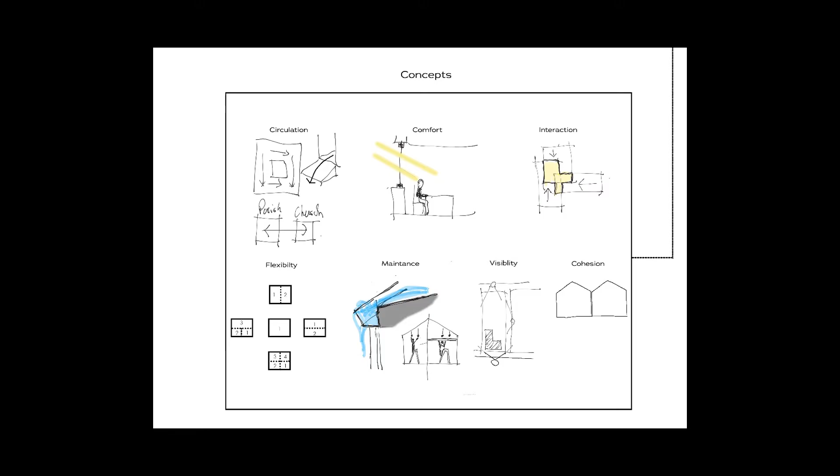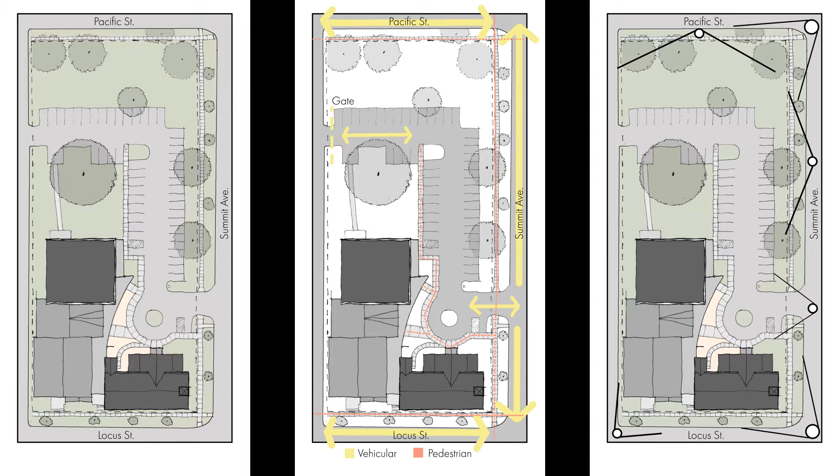Now on to views into the site. The three major views into the site are on Locust Street, Summit Avenue, and Pacific Street. Due to the trees surrounding the site, this can block your view into the site. The only real clear view of viewing the building is at the entrance at Summit Avenue. Due to the trees surrounding the site, it can cause the community to overlook the building.

Now the water runoff diagram. The site slopes downward diagonally from the corner of Pacific Street in the alley to the entrance of Locust Street and Summit Avenue. Water drainage mostly runs down the parking lot and out the main entrance to Summit Avenue. The water also drains down towards the parish hall into a drainage ditch, which either flows into the parking lot or into the alley. There are some surface runoff issues throughout the site. One of those spots is the parking lot by the Circle Drive in the main entrance.

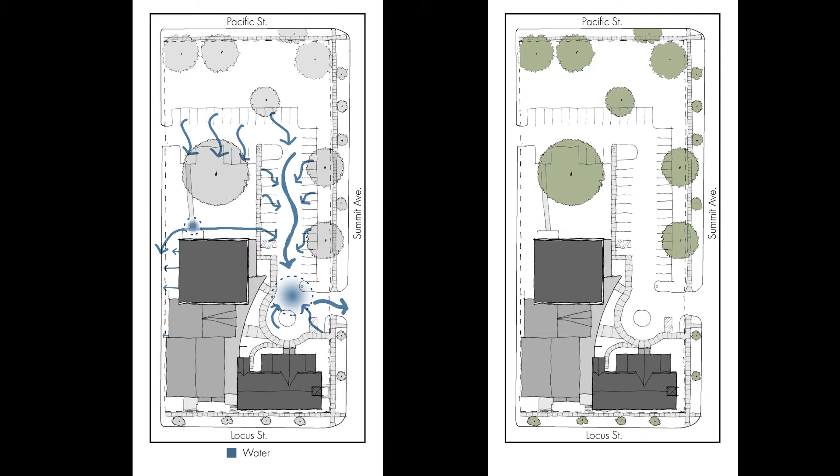Next is the vegetation diagram. There are a total of 18 trees on or adjacent to the site. The site is mostly covered by trees, with one historical tree in the center just north of the parish hall.

Lastly, our solar and wind analysis. Our sun gets as high as 78 degrees in this area and as low as 30 degrees in the winter. In the summer, we will want to block the southern side of the building with shading devices, and then allow sun to come into the building in the winter times to warm up the building. Most of our prevailing winds come from the south direction, with non-prevailing winds coming from the northeast and the northwest.

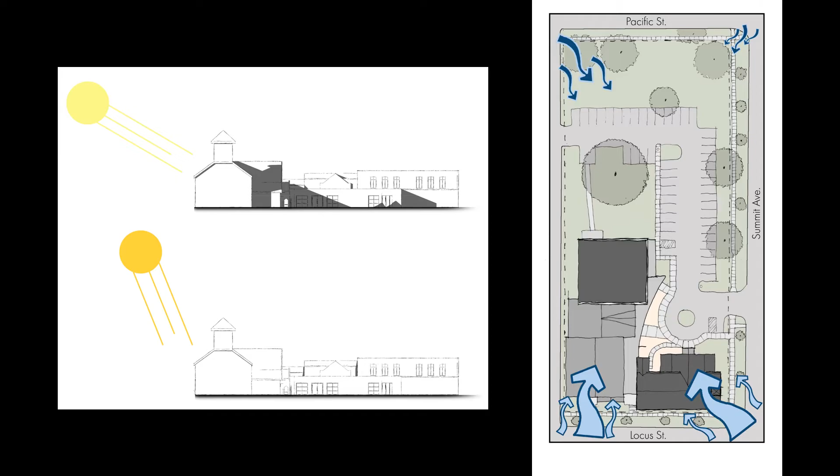Now I'll move into my design solution. It is broken into phases for financial reasons and for the practical needs of the church.

Phase 1 is preparing for the future. Phase 1 is the first step towards the future. The purpose of Phase 1 is to resolve today's problems, which involve the educational spaces and the overall building form of the church additions. These changes are necessary because it will lay the foundation for the future expansion in the coming phases.

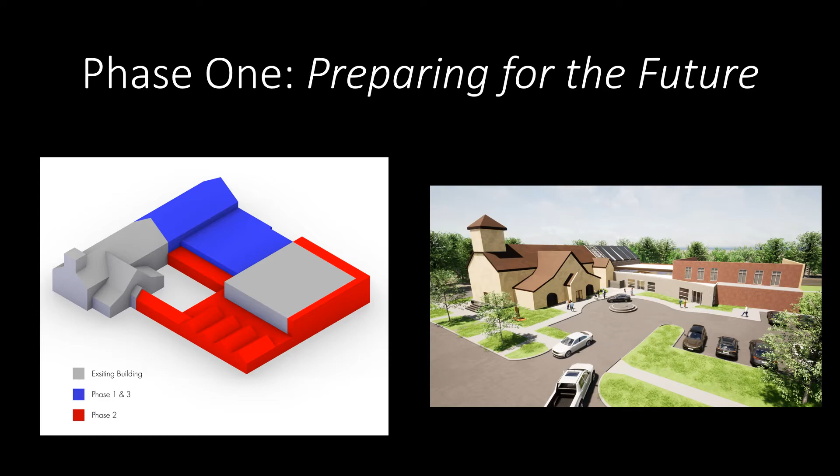Here's the Phase 1 floor plan, and this is where you can see the changes to the educational spaces. The changes for the educational spaces is to create a progressive learning environment that fosters collaboration, flexibility, and technology. I've accomplished this through the following design solutions. The building is expanded flush with the south wall of the church to create more space for the classrooms.

All walls separating the classrooms are removed and replaced with either partition walls or no walls at all, so that can expand the size of the classroom if needed. All spaces are furnished with modern equipment and furniture so that one space is no different from another, creating more harmony.

I've created a space just outside of the classroom area in the south side called a flex room, which is designed for casual meetings, hanging out, or even just wanting to be secluded. The space will hopefully foster collaboration between the different age groups.

The precedent that I use for the educational spaces is Sherwood Elementary in Springfield, Missouri, designed by Sapp Design.

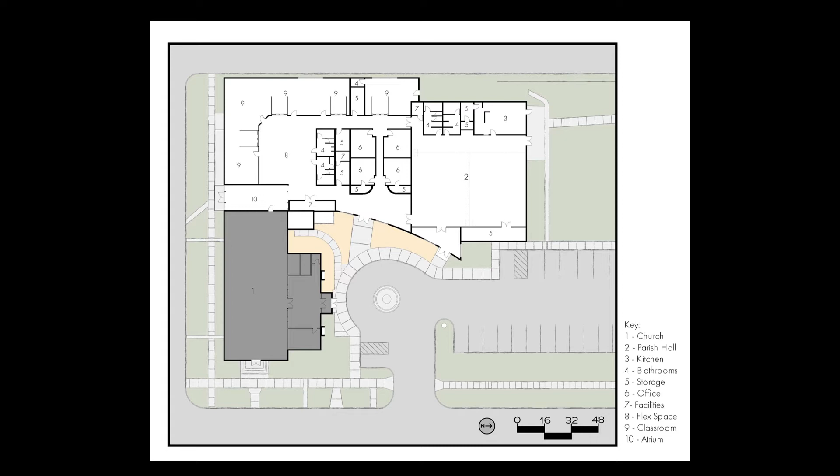The last change is related to the overall building form. The most notable difference is on the south side, where I have created an abstract form of the church to create a cohesive form along that side of the building. Between the two forms is a glass atrium which brings light into the building, which before had hardly any light coming in, while also serving as a merger between the church and the new form.

The materials I have used for the new form is slated stack rock, which would be locally sourced from the Ozarks, and for the roof would be standing seam metal.

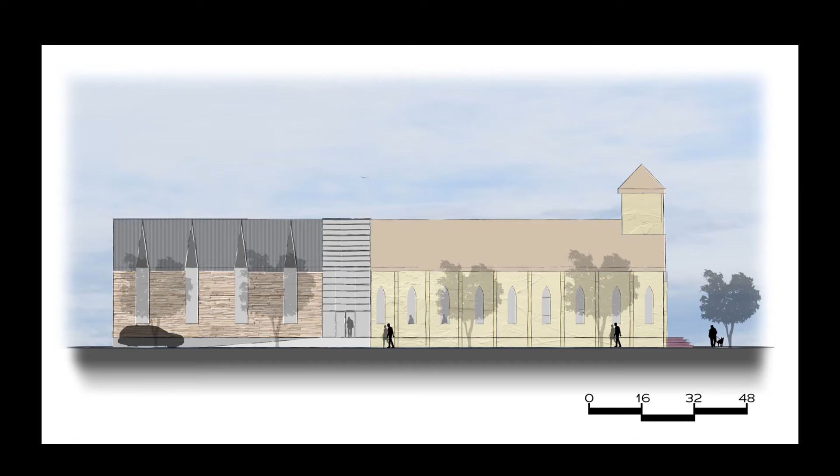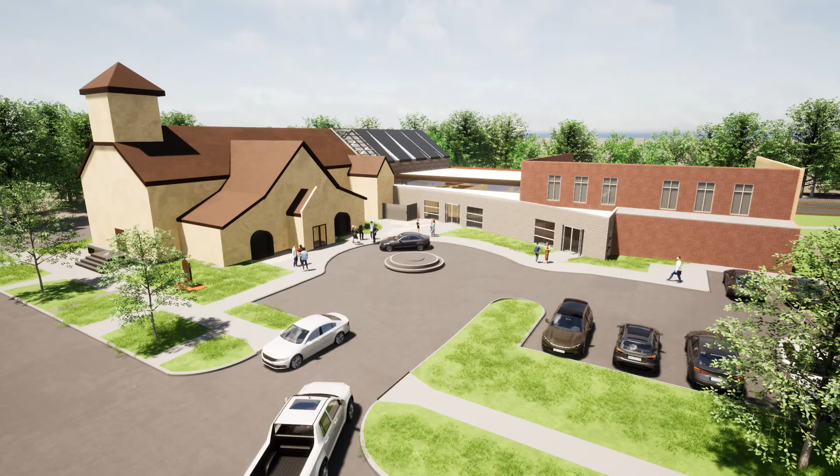Here is an exterior perspective from the main entrance. Here you can see the building form changes and how they relate to the existing condition. Here's another exterior perspective showing the new building form and how it relates to the existing church.

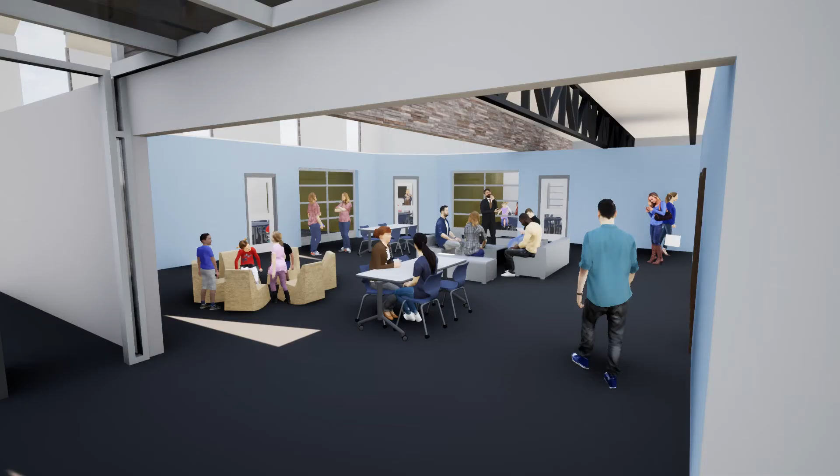Here's an interior perspective looking into the educational space and at the flex room. This is an interior perspective of one of the classrooms. This perspective shows one of the current layouts that could be used in the classroom.

After Phase 1 will come Phase 2. Phase 2 is titled Connecting the Parish Hall to the Church. Phase 2 is the most significant expansion.

The expansion is needed for the overall growth of the church and other issues like lack of connection between the church and the parish hall, circulation, the parking lot configuration, the need of new office and meeting gathering spaces, and enhancing the parish hall. Throughout the next slides, I will talk about the proposed changes within Phase 2.

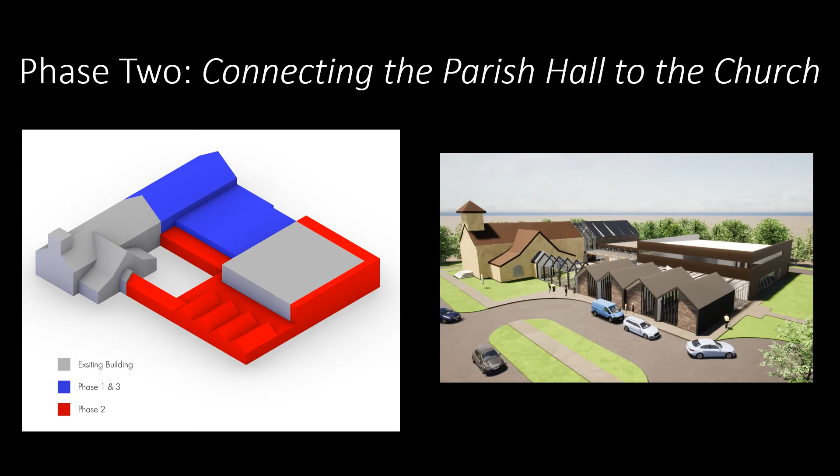First, I'll talk about the new parking lot configuration and the glass corridor. The parking lot is moved northward, creating a second entrance and exit coming off of Pacific Street. I expanded the building to the east, which took over the existing circle drop-off and entrance into the church.

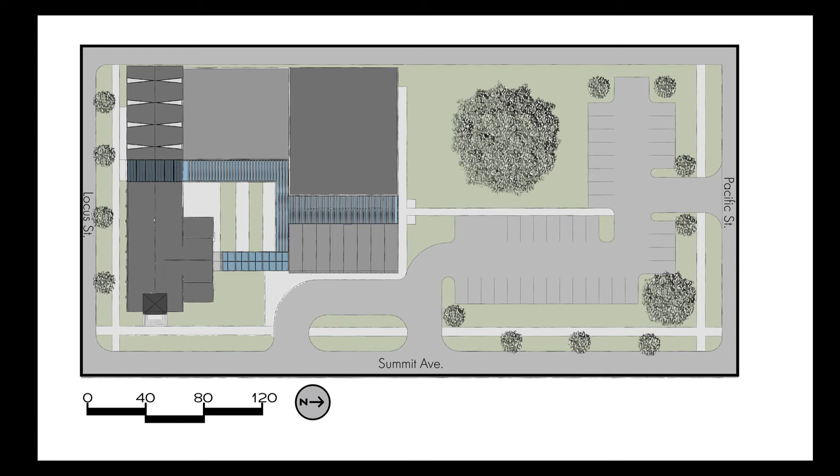In result, a new functional drop-off lane with the ability for a car to drop off and a car to drive around it at the same time. Also with the drop-off lane, I've created a new church entrance that is connected to the actual church by a glass-covered corridor.

To the east, a new office area, flex room, a new main entrance coming off the new parking lot are created. To the west, space for a corridor is added with a new emergency exit along the west side of the building where the utility room used to be, and also an expanded kitchen area too.

Lastly, to the north, a new entrance into the parish hall is created near the new entrance. I've also put sliding glass doors to give access to the outside from the parish hall for events like Festival of Nations.

Next space is the courtyard. A new outdoor courtyard is created where the old entrance and drop-off lane used to be. The outdoor courtyard is surrounded with glass sliding doors.

This provides solutions like fluid transition between services, allowing people to socialize in the courtyard instead of inside the church, more space for the Festival of Nations, and allowing natural light to come into the building. The glass doors can also be opened to expand the courtyard area, which allows people to flow into the surrounding hallways and into the parish hall.

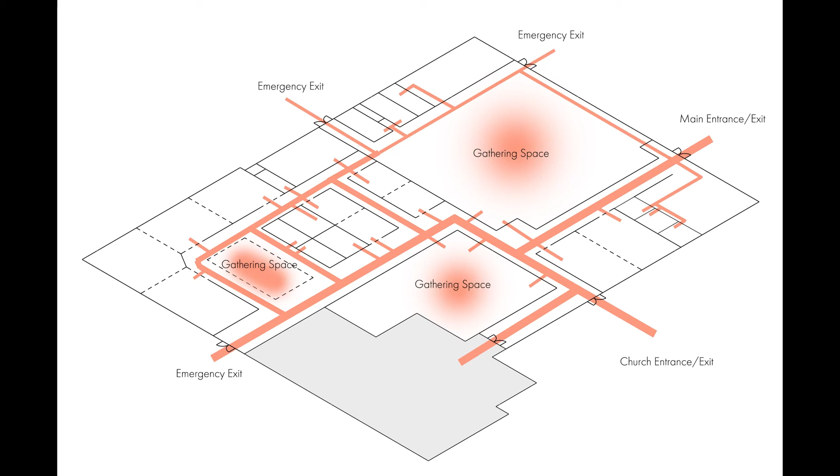Here's the Phase 2 furniture layout. This is the Phase 2 circulation to use diagram, showing the different connections, hallways, and gathering spaces throughout Phase 2.

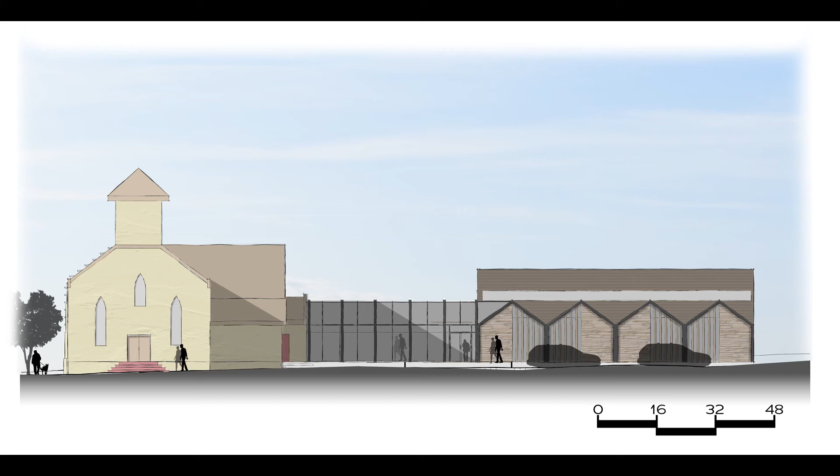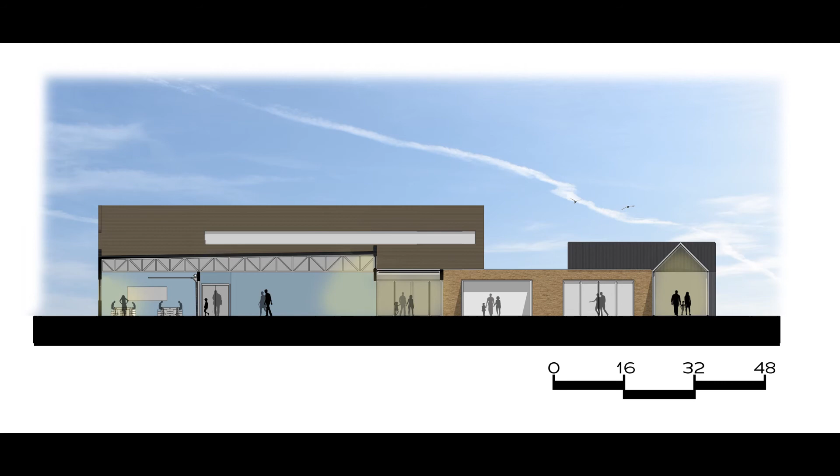This is a longitudinal section cut that cuts through the classroom spaces and into the parish hall. This section shows how direct and ambient light enters the space, while also showing the spatial qualities of the different spaces.

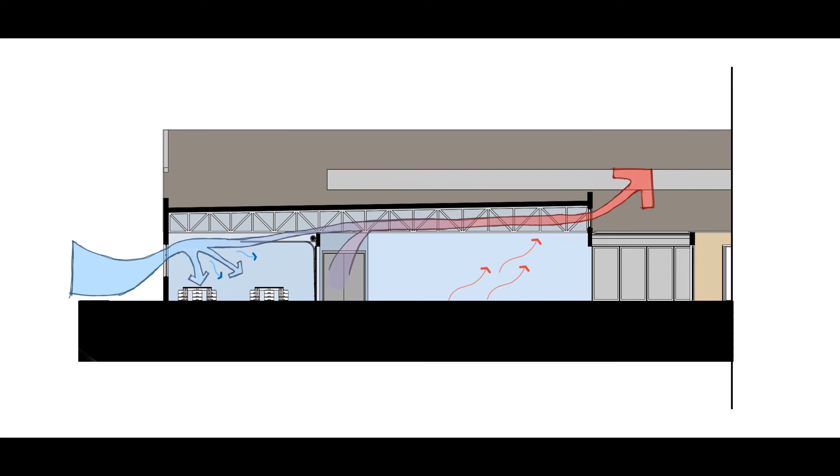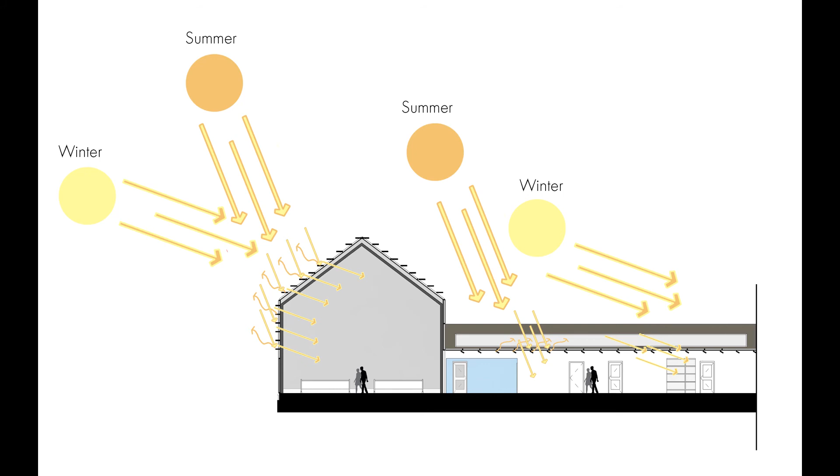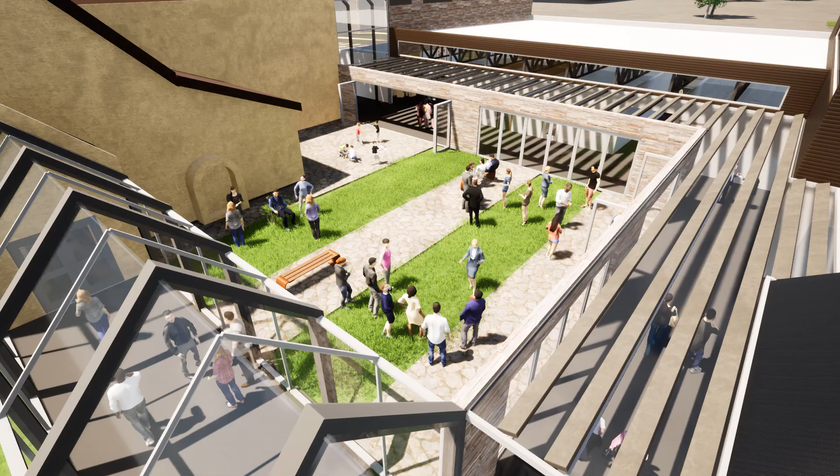This is an exterior perspective showing the overall form of the building. This is a bird's eye perspective of the new courtyard, and this is another exterior perspective of the courtyard.

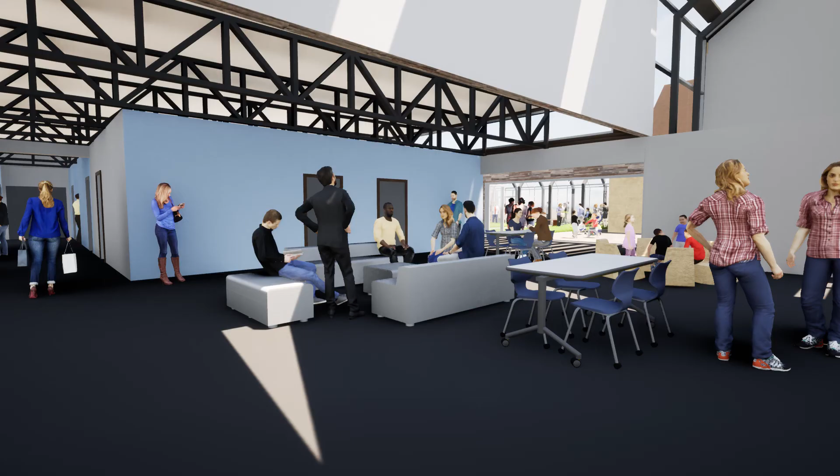This picture shows the ability of the glass doors to open, allowing people to flow in and out of the spaces. This is an interior perspective of the flex room down by the educational spaces.

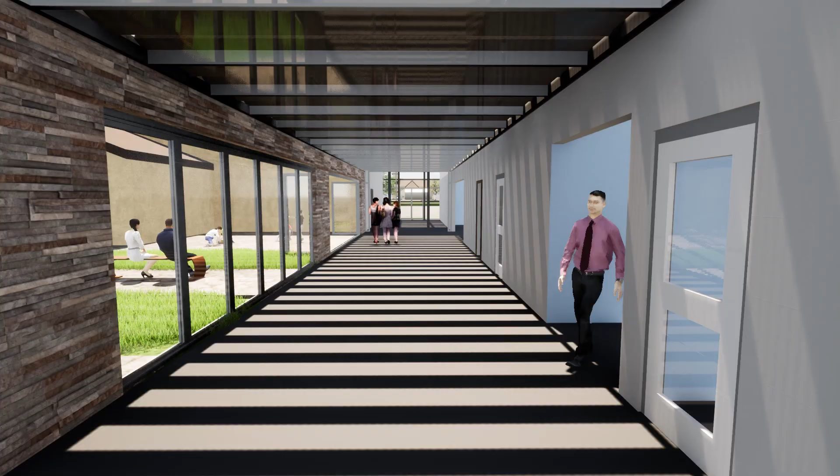This is an interior perspective from the corridor looking out into the courtyard, and this is an interior perspective looking at the corridor that connects the courtyard and the educational space.

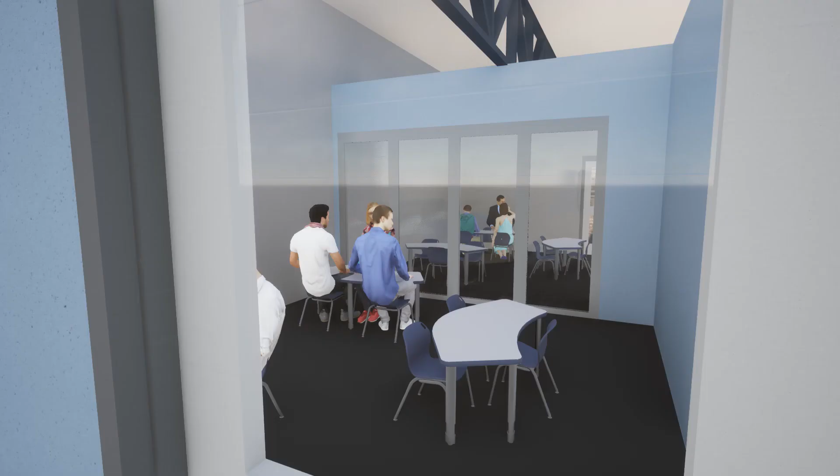This is an interior perspective of the parish hall. This is an interior perspective looking into the smaller flex spaces, and this is an interior perspective of the new office area.

Within the office area, there are louvers in front of the windows, only allowing light during the later part of the day.

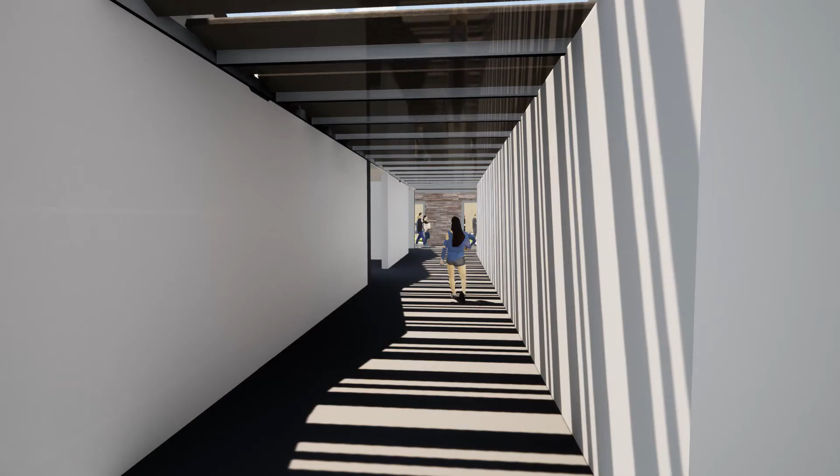This is an interior perspective as if you were entering the new main entrance.

And finally, Phase 3, which is titled Expanding the Church Services. In Phase 3, a new congregational hall would be created, which can be used for multiple events. I believe this is necessary because it gives Sacred Heart the opportunity to expand its services and allow more people to become a part of the diverse community the church is.

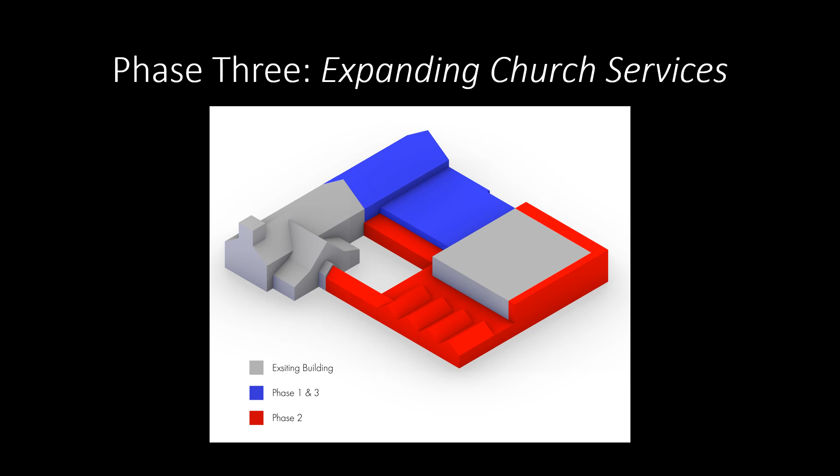With the new hall, you will have the ability to have two masses going on at the same time, or allow one large mass for big events like Christmas or Easter. This way, both old and new halls could be combined to make one big congregation. This would be possible by having two altars, one which would be removable.

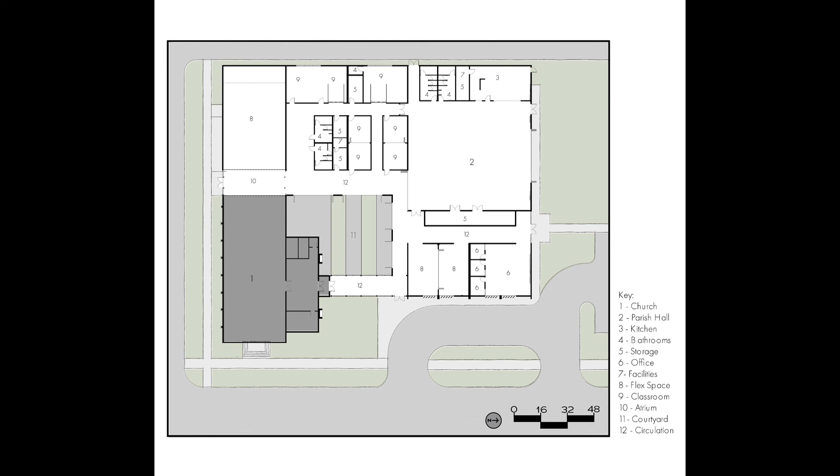As you can see in the program diagram, the classrooms made in Phase 1 have been moved to the old office area or the new flex rooms created in Phase 2. And the furniture plan shows the layout for the new hall.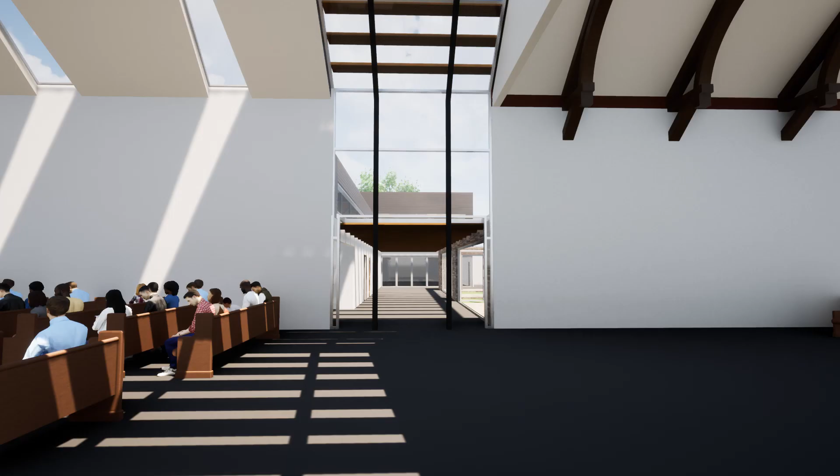This is an interior perspective of the new hall with a mass currently going on. This is an interior perspective showing the relationship between the old and the new and the glass atrium, and this is an interior perspective looking towards the parish hall.

Overall, with this design move, I believe the church would be a great example to spark a conversation that is needed within the community on how to expand and build next to historical buildings.